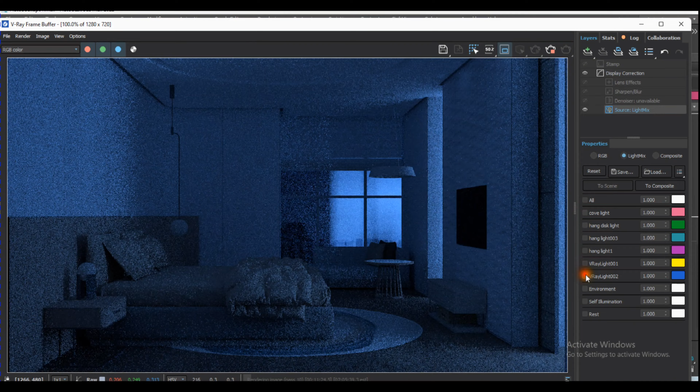Hello guys, welcome back. In this tutorial we will discuss about light mix, how we can change the light color, intensity and many more things. Let's get started. Well, we have this scene.

First of all, we will select light sources just like this. This is hang light. I will isolate this and give it a sphere light, something like this. We will place light inside this object accordingly, just like this, and give it proper naming so that we can change the intensity, color, etc. after applying light mix.

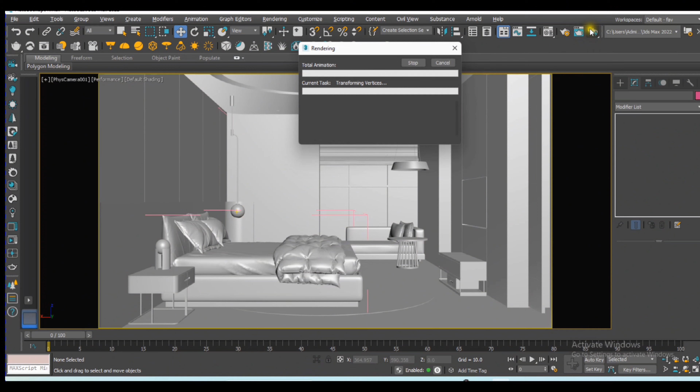We can change a few settings just like multipliers and temperature. We can change temperature of this light. Just I'm giving it temperature light, it means warm light. I will show you how it is looking in render. Just like this, you can see in render light effect.

Okay, that's it. Now we will check another light. We will give it table lamp, just like this. We will isolate this one, select this one, isolation, and we will give it a sphere light. No, we can apply the same light which we assigned in previous object. We will drag it, make it copy and give it instance so that we can change anything in previous light.

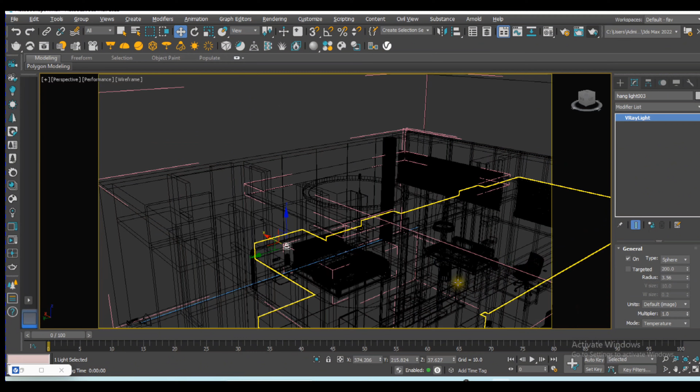It will affect on this, just like this. Okay, you will place it and you will manage it inside table lamp light source. That's it. We will check once again. Now you can see this kind of effect generated. Okay, it's looking quite nice.

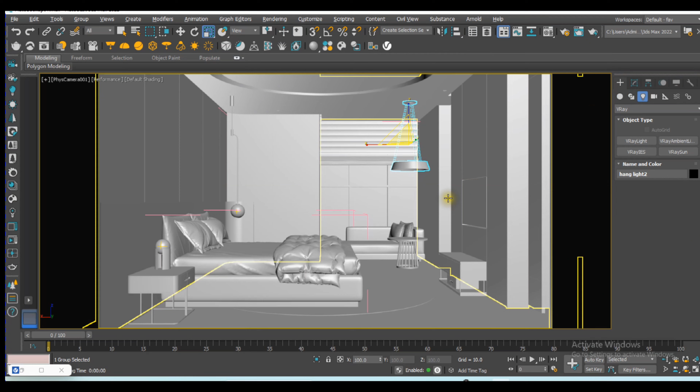Now we'll move to another light, which is this one. We'll manipulate this, we'll isolate this and give it rectangle light. Go to parameters, rename it hang light. I will give it to disk light and manage it inside this, and a few changes, a few settings we will give it, just like this. You can change its direction.

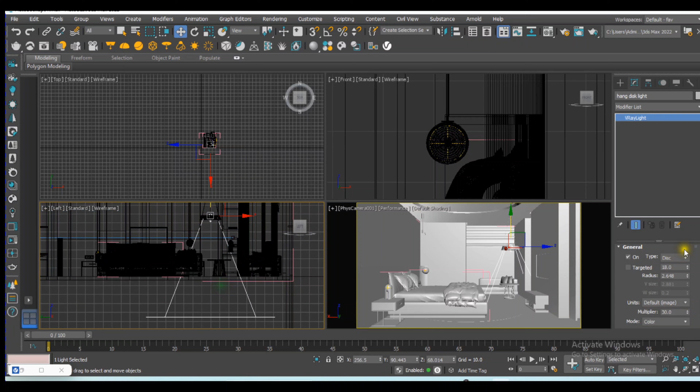Its target has gone down. We can manage that accordingly. The scene, it's like this. Floor to floor, just like this. That's it. Now we will manage radius of this light and check once again render, and you can see

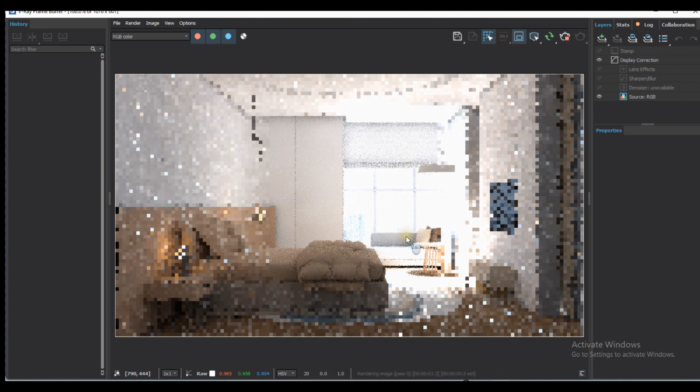it is burning, something like this. We can manage intensity. Go to multiplier 1 and give it temperature light. It's temperature 3250, something like warm light, and you can see.

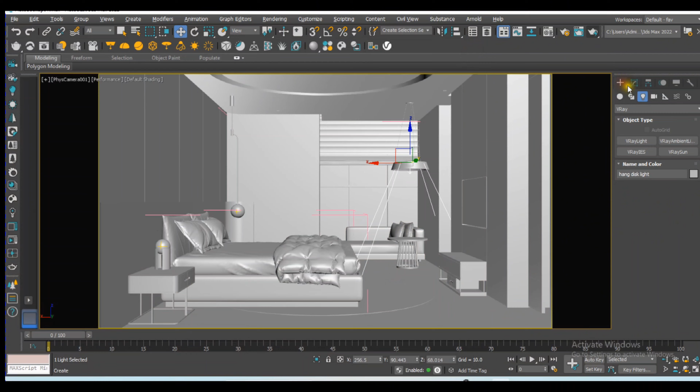Now move to another light. This is cove light. We will select the source for cove light, this one, and isolate this one, and make a duplicate of this object. Just like this. And scale down a bit like this,

and give it to mesh light from the Vray toolbar. This one, mesh light. Now we will check the Affect Pivot. We will take it to center. We will manage it accordingly and push it up a bit like this, and we will check render once again.

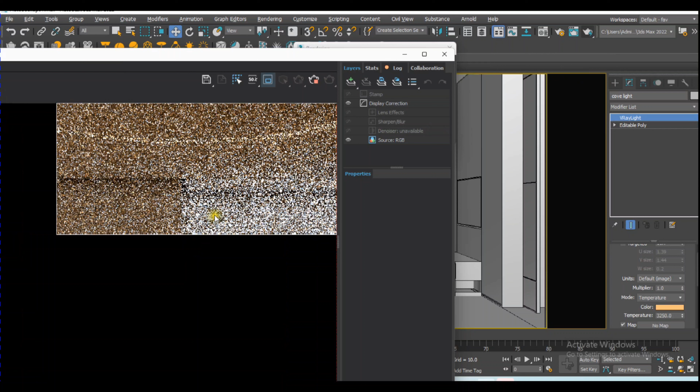We will give it proper naming, and you can see how it is looking in render. That's cool.

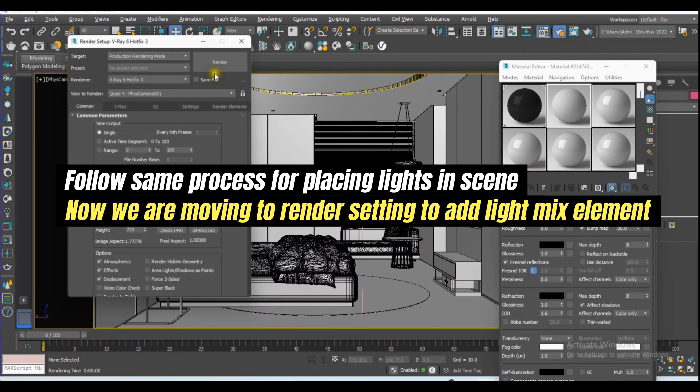After placing all the light in the scene, we'll move to render settings and we will apply light mix element. So go to element mode and add light mix. We will select light mix and give it a few adjustments, individual layers, and I will render it.

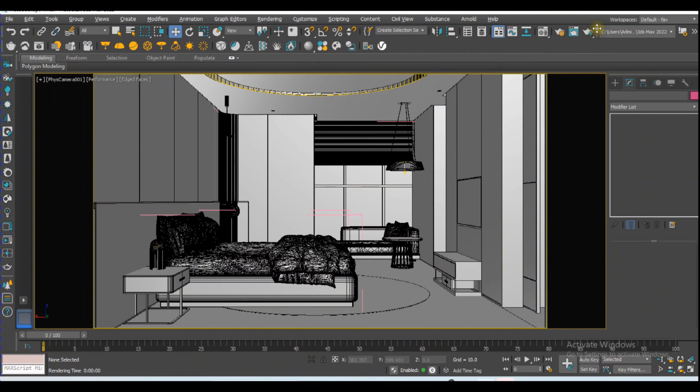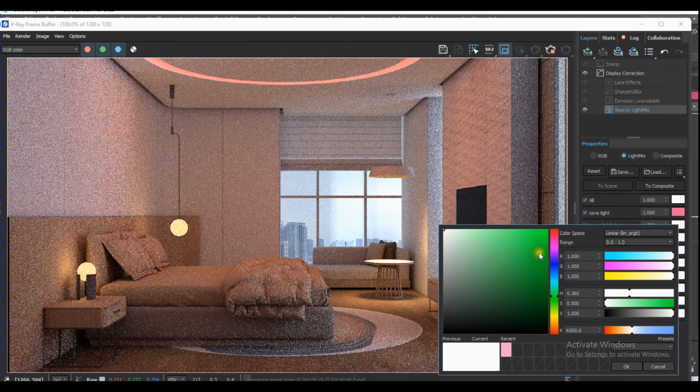And we can see we have light mix properties right here, and you can adjust light, color, intensity, and many more. You can adjust these settings one by one: color, intensity, enable, disable light mode, and many more things.